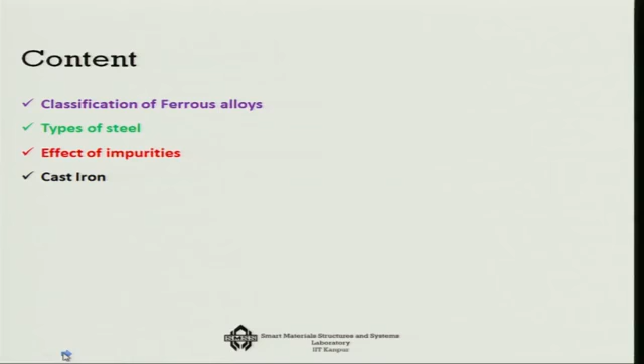In this particular lecture I am going to talk about classification of ferrous alloys, various types of steels, the effect of impurities, and also another iron based alloy which is actually a composite rather than an alloy, which is cast iron. So, these are the things we are planning to discuss today.

Now, when we are talking about metallic alloys, there are two basic classifications. One is the ferrous group, where the base metal is iron, and another is the non-ferrous group, where the base metal can be anything like aluminum, copper, zinc, or at times nickel, titanium, and their alloys.

Now, iron based alloys are classically much more extensive in terms of use, and also they are in use for a very long time. If you remember, I showed you the evolution of materials where iron came first, and it still has a very large base, mostly because iron is quite abundant on earth as a mineral.

But the interesting thing is that aluminum is actually more abundant than iron. The problem is that extracting aluminum is a high energy procedure. It is so energy intensive to get aluminum from the earth's crust that it is relatively less popular than iron and relatively more expensive, even though aluminum is much more abundant in the earth's crust.

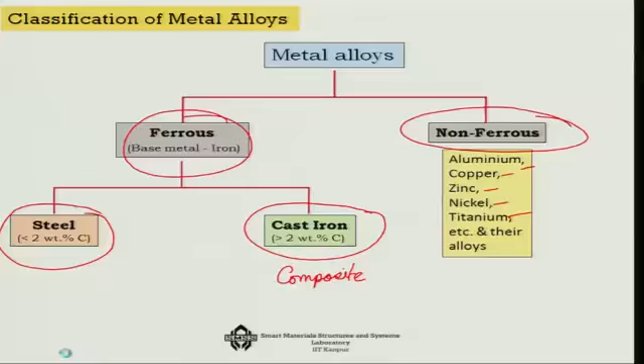So, the journey with iron, as I earlier told you, began about 3000 years ago and is still continuing today. One of the most important alloying materials in iron is actually carbon, which forms an interstitial solid solution. Now, what is this interstitial solid solution?

First of all, solid solutions means that both the solute and the solvent are at the solid state itself, in this case the iron and the carbon. Then how do you get the solution? The carbon atoms, with atomic radius something like 0.071 nanometer, are actually much smaller than the iron atom, which is like 0.124 nanometer.

So, there are actually two different types of solid solution possible: one is interstitial solid solution and another is substitutional solid solution. Substitutional solid solution happens when the atomic radius of the impurity is of the same order as the base material. On the other hand, in this case, since the atoms are very small, they do not substitute any atom, but they basically go into the space between the atoms. Thus steel is formed when carbon goes into the space between the iron atoms.

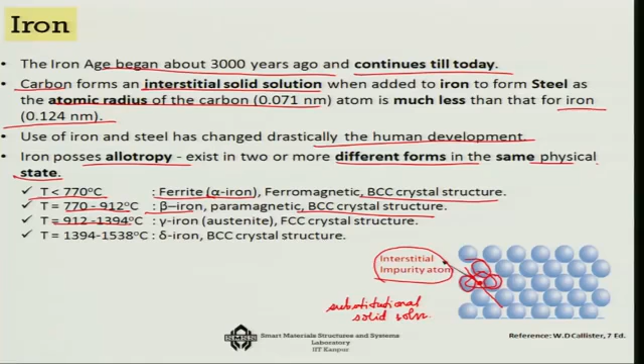If you go from 912 to about 1394, you will get another version known as gamma iron, and this is not BCC anymore, it has an FCC crystal structure, which is also called austenite. Again, beyond that up to 1538, you get another phase of iron, delta iron, which has a BCC crystal structure.

So where are we? We start from BCC. Again at a higher temperature we have BCC, but ferromagnetic transitions to paramagnetic. Then from BCC we go to FCC, and at an even higher temperature we go back to BCC. That is how the alpha, beta, gamma, delta phases and the allotropies of iron are actually distributed.

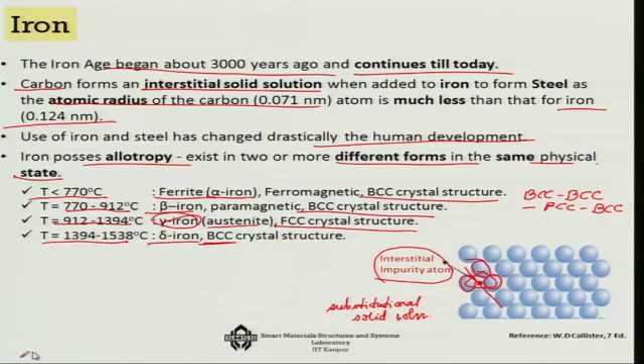Now, the penetration of carbon into iron, as I told you, had a very significant economic effect. If you look at the crude steel production over the roughly 65 years between 1950 to 2015, from the World Steel Association report of 2016, you would see some interesting trends.

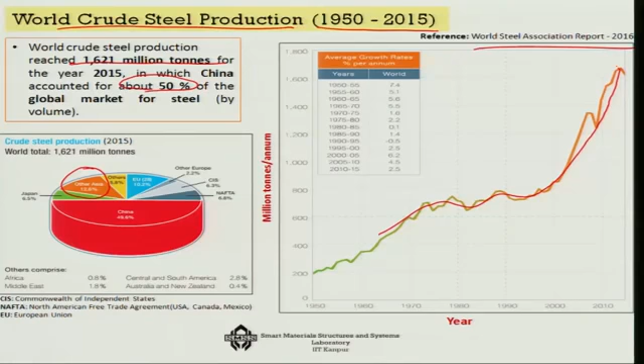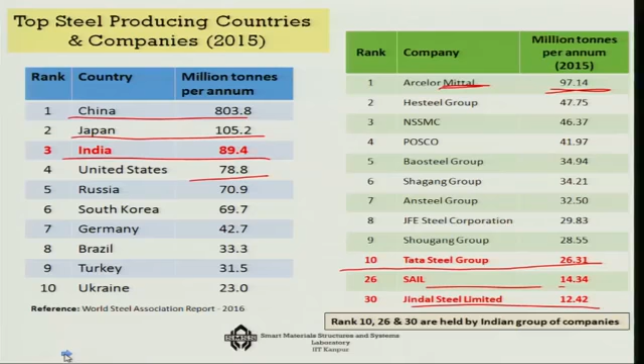So that is why steel is one of the very important materials for our economy. Now, steel we know is a solid solution which has interstitial carbon present in it, but the presence of carbon is smaller, less than 2 weight%. If it becomes more, then we go to the cast iron phase. So if it is less, we get steel, but even that itself has many variations.

For example, depending on the presence of other alloying elements, if there are less than 10 weight% of other alloying elements, then this carbon and other element composition will give you the low alloy steel. If it is greater than 10 weight%, then we get the high alloy steel.

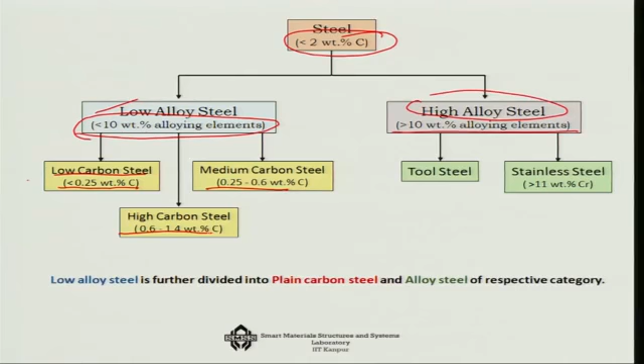Now, among the low alloy steel itself, there are 3 different types. One is low carbon steel, which has less than 0.25 weight% of carbon, then medium carbon steel 0.25 to 0.6%, and high carbon steel 0.6 to 1.4%. Among the high alloy steel, which has greater than 10 weight% of alloying elements, again there are 2 subgroups: one is tool steel and another is stainless steel.

Now, stainless steel is very distinctly classified because of the presence of chromium in it.

In fact, greater than 11% presence of chromium gives steel the quality that it will not get corroded very easily at all, and that is how stainless steel gets its name.

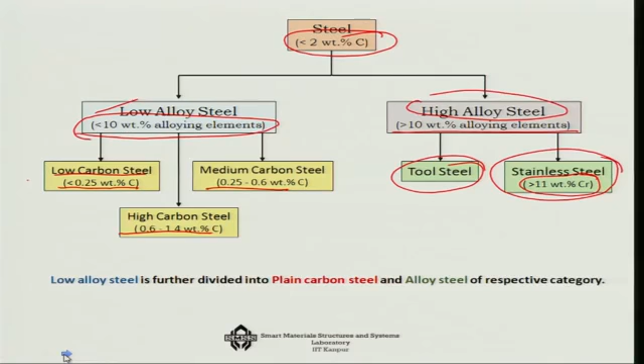Now, when we are talking about plain carbon steel, out of these low alloy steels, what do you mean by it? There is an AISI definition that says if you do not specify the minimum content of materials like chromium, cobalt, molybdenum, nickel, titanium, tungsten, vanadium, zirconium, etc., to be added to obtain a desired effect, then that would be one qualifying point for a plain carbon steel.

Again, the copper should not be more than 0.4%. And finally, the maximum content is restricted for manganese to 1.65, silicon to 0.6, and copper to 0.6. So copper must be within a range of 0.4 to 0.6, manganese should not be more than 1.65 weight%, and silicon should not be more than 0.6 weight%, and the rest of the materials should be present but the minimum content is not specified. In such cases, we will consider these to be plain carbon steel.

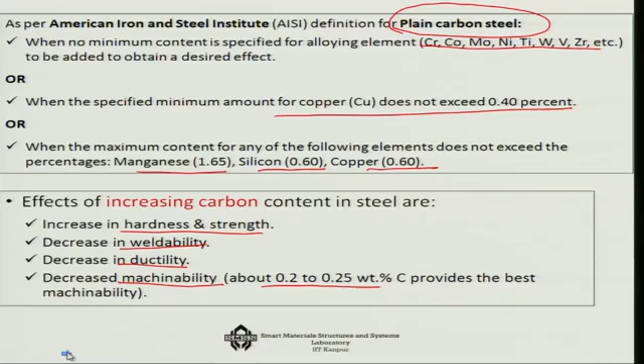As I increase the carbon content, my hardness and strength increases, but that comes with a cost, because there will definitely be a decrease in ductility, weldability, and machinability. For example, about 0.2 to 0.25% carbon provides the best machinability. So while increasing carbon you gain in hardness and strength, but you lose in ductility, malleability, machinability, weldability, etc. So there is a trade-off there, which guides us towards exactly how much is good enough for a particular product.

Now, the most versatile among the steels is low carbon steel, which contains less than about 0.25 weight% carbon. Because the carbon percentage is low, it is relatively soft and weak. It has ductility like 25% and toughness, also machinability, weldability, and it is less expensive to produce, with tensile strength of the order of 415 to 550 megapascal. Low carbon steel is used for general applications where high strength is not demanded, and this is generally known as mild steel.

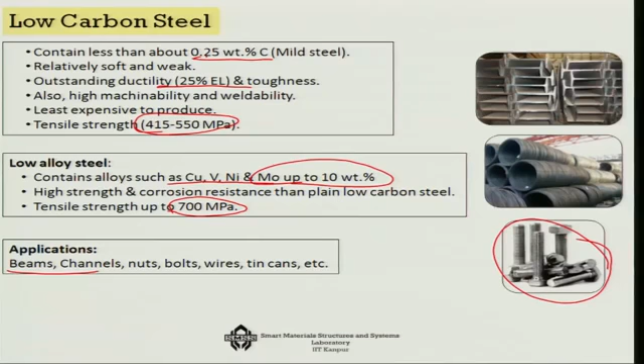There is a version called low alloy steel, which gives better strength, about 700 MPa, and in this you get more alloying elements, for example copper, vanadium, nickel, molybdenum up to 10 weight%. More than that it becomes high alloy. So low alloy steel has better tensile strength and many structural applications like beams, channels, nuts and bolts, wires, tin cans, etc. That is about low carbon steel.

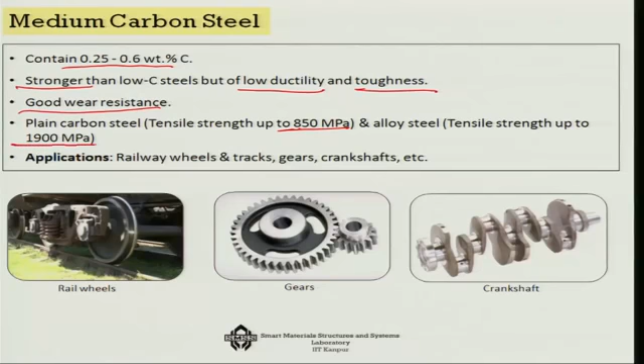Now, if the carbon content increases a little more, 0.25 to 0.6 weight%, we get medium carbon steel. These are stronger than low carbon steel, so strength has increased, but with low ductility and toughness. You sacrifice that, but it has good wear resistance. Tensile strength goes up to 850 megapascal for plain carbon, and if alloyed further you can go up to 1900 megapascal. No wonder it has heavy duty applications like railway wheels or tracks, gears, or crankshafts - wherever you need high tensile strength and toughness, that's medium carbon steel.

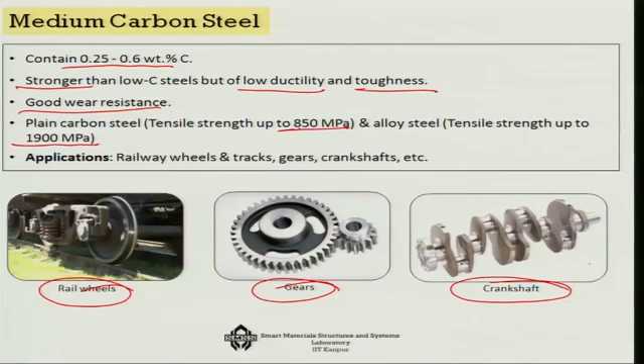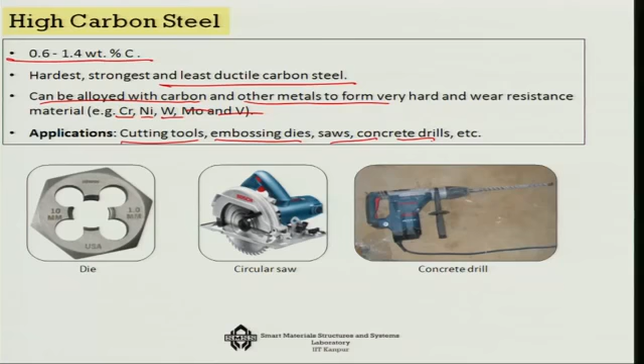Now, finally, if I increase the carbon more, from 0.6 to 1.4 weight%, this is the hardest, strongest, but least ductile carbon steel. That is why it is generally used for dies or similar applications. It can be further alloyed with carbon and other metals to form very hard and wear resistant material - if you alloy it with chromium, nickel, tungsten, molybdenum or vanadium, you get better wear resistance, and then you can use it for cutting tools, embossing dies, saws, concrete drills, and similar high strength applications.

Now, so far we kept our alloy percentage less than 10 weight%, only varying the carbon percentage from low to medium to high carbon. If the alloy percentage itself increases to greater than 10%, for example for drill bits and other rotating cutting tools, you can withstand higher temperature without losing hardness and toughness. For example, the high speed steel like 18-4-1, meaning it has 18% tungsten, 4% chromium, and 1% vanadium, with a carbon content of about 0.6 to 0.7.

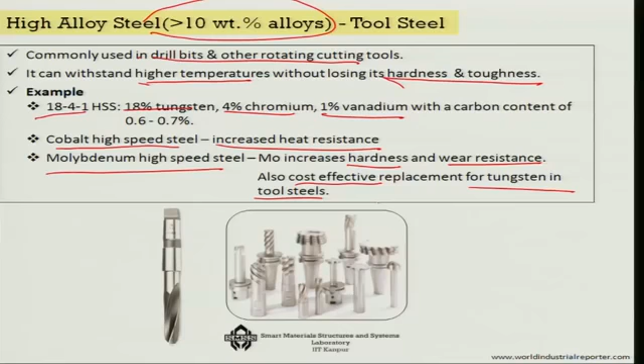So how much weight percent are we getting? Something like 18 plus 4, 22, 23, 23.7%, greater than 10 weight percent of alloys. You get a very good quality high alloy steel, which can be used for tools. Cobalt high speed steel is another example, used for increased heat resistance, or molybdenum HSS, where the molybdenum will increase the hardness and wear resistance, and also become cost effective because you are replacing tungsten in the tool steel. So all these high alloy steels are mostly used as cutting tools and drill bits.

Now there is another group of high alloy steel which also has greater than 10 weight percent of alloying material, but it has a single most important alloying material, that is why it is a separate class: chromium, at least 11 weight percent. The presence of chromium gives it high resistance to corrosion.

For example, 18 by 8 stainless steel has 18% chromium and 8% nickel. This gives it a very high resistance to corrosion. That is why they are applied for applications like cryogenic vessels, food processing, gas turbines, high temperature steam boilers, heat treating furnaces, nuclear power generating units, and various other types of boilers. So that is about stainless steel.

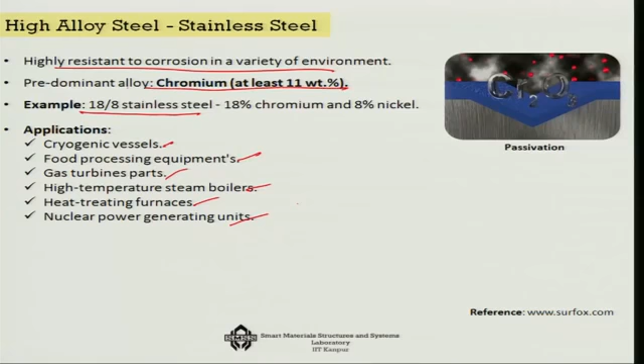Corrosion resistance may also be enhanced by nickel and molybdenum addition. Now boron, very interestingly, even though it is an inorganic material, it is actually used for making even composites, which I will talk about later, used for making materials like space shuttles, because it has a very good high temperature property.

Cobalt and tungsten are generally used to improve strength and hardness at high temperature. Sulfur improves the machinability, particularly when combined with manganese, but it increases the brittleness and lowers impact strength.

I would also like to tell you that sulfur was one of the most important components in the earlier minerals, the iron ores found in India, and that of course gave it an excellent corrosion resistance, both sulfur and phosphorus.

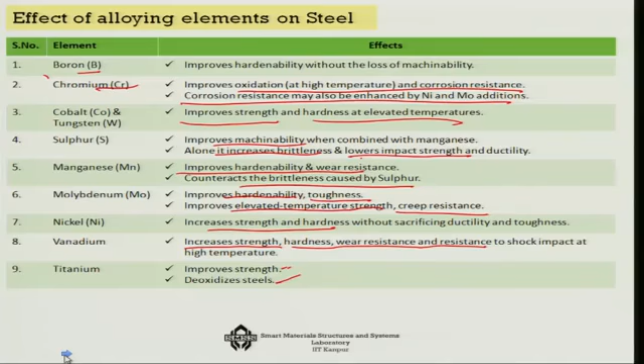Now suppose you have some property in mind, you can use this table, say hardenability. What is hardenability? It is a way to indicate a material's potential to be hardened by heat treatment. Now if I want to increase this hardenability through heat treatment, we should go for chromium, manganese, molybdenum and titanium, and then tungsten and vanadium. Particularly vanadium is very good in terms of increasing the material's potential to be hardened.

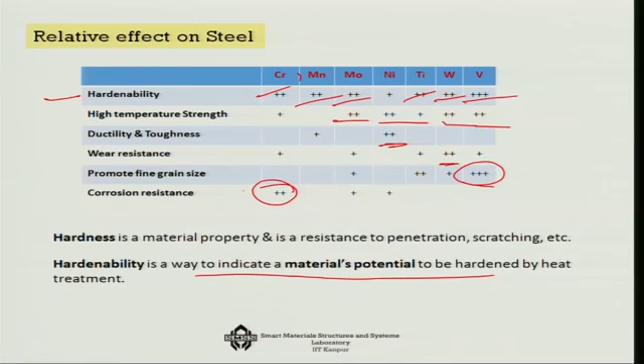If you talk about high temperature strength, then molybdenum, nickel, tungsten, vanadium are actually very good. From a ductility and toughness point of view, nickel is good. From a wear resistance point of view, tungsten alloy is good, and to promote fine grain size, vanadium is good. From corrosion resistance point of view, chromium is good. So each one of these alloying materials has its unique contribution to the property of steel alloys.

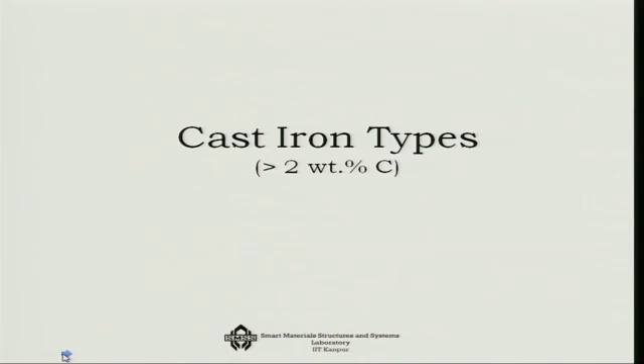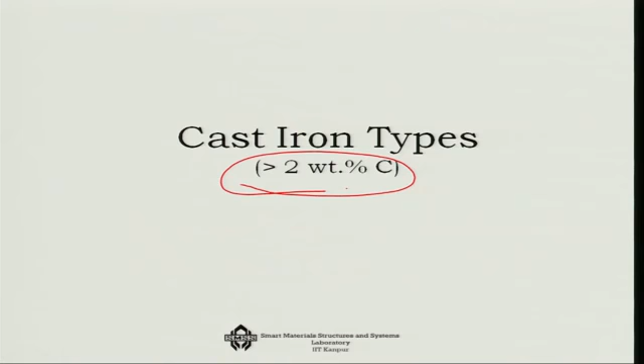Finally, we are going to talk about cast iron, where the percentage of carbon is even more than what we have seen earlier in mild steels, greater than 2 weight% carbon. That is the cast iron system we are talking about. Now, there are quite a few variations of cast iron.

The first one to see from a vibration application point of view is grey cast iron. It has a carbon content which varies from 2.5 to 4%, and here the graphite, remember this is a high carbon content, exists in the form of flakes, as you can see each one of these flakes.

This graphite flakes give it excellent self lubricating and vibration damping capability. The strength and ductility are much higher under compressive loads, and the tensile strength is somewhere between 120 to 280 megapascal. This is applied in structures like machine foundations or heavy equipment exposed to vibration. In all these cases, grey cast iron is definitely one of the most popular.

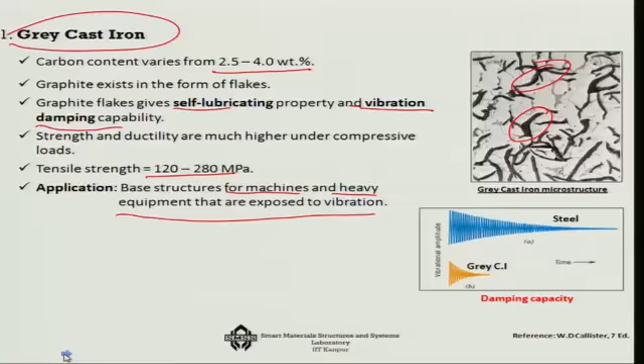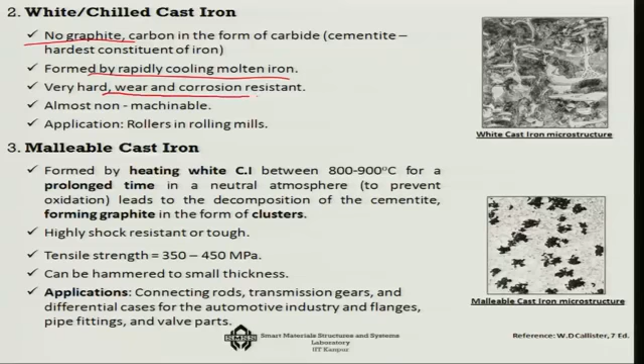Then the other variation is called white or chilled cast iron. In this, no graphite formation takes place; carbon remains in the form of carbide. It is generally formed by rapid cooling of molten iron, is very hard, wear and corrosion resistant, almost non machinable, and used in applications like rollers in rolling mills.

Then there is malleable cast iron, which is formed by heating white or chilled cast iron between 800 to 900 degree centigrade for a prolonged time in a neutral atmosphere to prevent oxidation, leading to decomposition of the cementite forming graphite in the form of clusters.

These are highly shock resistant, with tensile strength between 350 to 450 megapascal. It can be hammered to small thickness, and is used typically for connecting rods, transmission gears and differential cases in the automotive industry, and flanges, pipe fittings and valve parts.

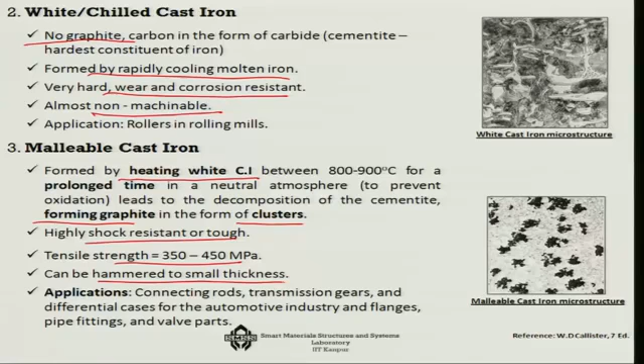Now let us look at another form of cast iron: ductile or nodular, or spheroidal cast iron. Incidentally, when we extract iron, unlike plain iron, we mostly extract it in the form of nodular iron. Similarly, you can design your own nodular iron by adding a small amount of magnesium, 0.1 to 0.8%, to molten grey cast iron, leading to the formation of graphite in the form of spheres.

It has high fluidity and high tensile strength. It is tough and wear resistant, with good machinability and weldability, and it is designated as SG 900/2, representing tensile strength and percentage elongation.

The next one is actually the mottled or compacted cast iron. This is usually made using grey and ductile cast iron; the carbon remains in both stages, partly free and combined form. Graphite has a worm-like appearance and the system has higher thermal conductivity. It has better resistance to thermal shock, lower oxidation at elevated temperatures, and its applications are in diesel engine blocks, exhaust manifolds, gearbox housings, flywheels, etc.

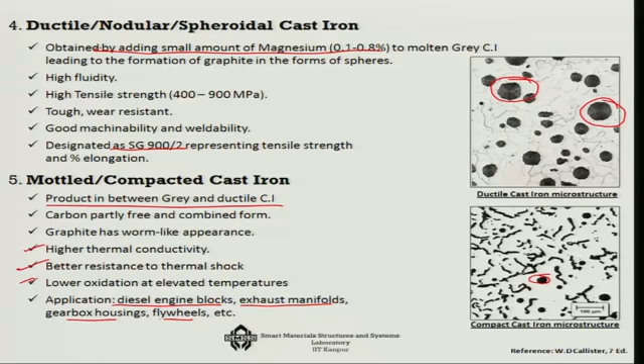In terms of compacted cast iron, you can see that it is in between grey and ductile cast iron, because graphite formation is present here, but not to a very high degree. So that is about some of the cast irons.

Now, the effect of impurities on cast iron: suppose if I add silicon as an impurity, then it favors the formation of free graphite, makes iron soft and easily machinable, and provides sound casting free from blowholes due to its high affinity to oxygen.

If I add sulfur, the cast iron will become hard and brittle, and above 0.1% it gives very unsound casting. So we should not add too much sulfur.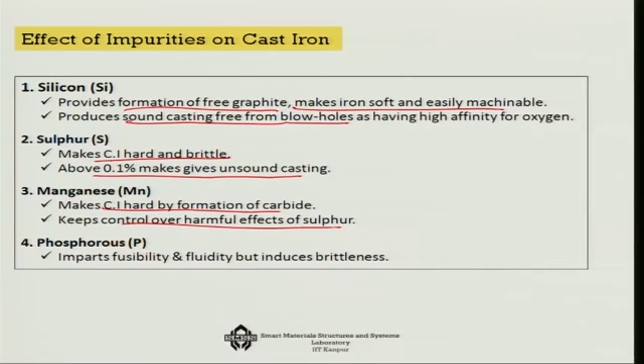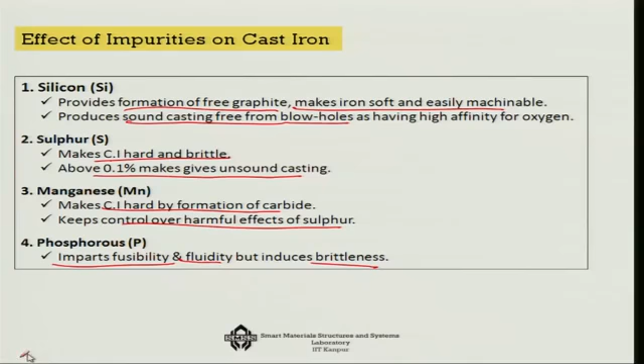If I add manganese, it will make it hard by formation of different types of alloys, but it keeps control over the harmful effects of sulfur. If I take phosphorus, it imparts fusibility and fluidity, but also induces brittleness. So we have to add it in a very limited manner.

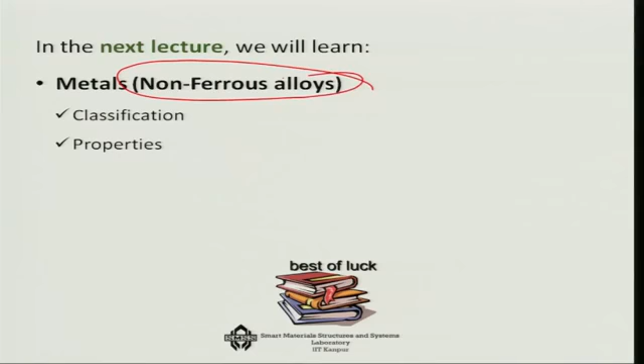Now this is where we will complete our journey of the iron based alloys. In the next lecture, we will talk about non-ferrous alloys, their classification and their properties. Thank you.